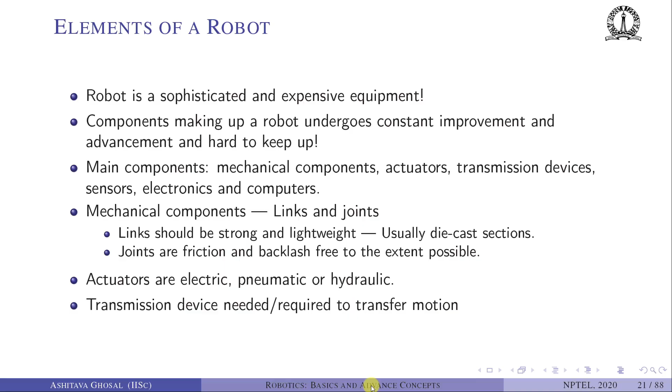We look at links and joints, we look at actuators, we look at transmission devices, and then we will also look at sensors. The sensors enable a robot to possess touch and feel, sense motion and force, and to see and learn. Sensors are required for feedback control.

These are sometimes called internal sensors. There are also external sensors which can sense touch and force, measure distances, and cameras which can see the environment.

There are also some specialized sensors for welding, painting, assembly, and other industrial operations. We need to make sure the weld bead is the correct height, and we can change some parameters automatically, or see that the welding is happening at the right place. So those are very specialized sensors.

The computers and software which go into a robot are often more expensive than the hardware. We have one or more processors to control the motion of the actuators. We sometimes have processors for signal processing and sensing. We also have processors for user interface, data logging, communication, and other activities.

So typically in a robot, you have a lot of computing power, and there is a lot of software which has been ported onto these computers to do a variety of tasks. We also have offline programming systems with user-friendly GUI to train the operator, verify motion, and reduce downtime of a robot.

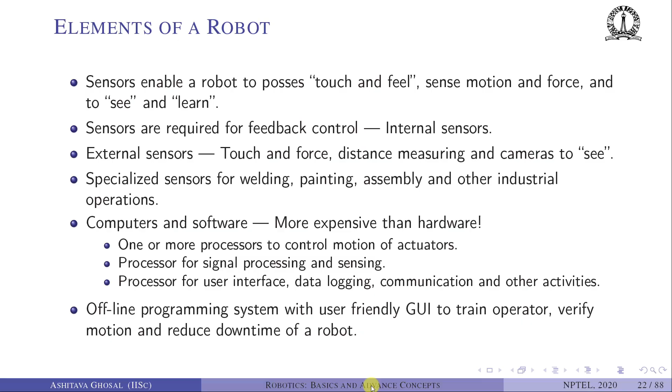Let's continue. As I said, we'll look at joints, links, actuators, transmission devices, and sensors in this lecture. So what is a joint? A joint is nothing but an element which connects two or more links.

Basically what does a joint do? It imposes a constraint on the links it connects. So if you have two rigid bodies in 3D space, each of them has 6 degrees of freedom, so you have 12 degrees of freedom total.

If you now connect these two rigid bodies using a hinge joint - a hinge joint is one which allows rotation or relative rotation between the two connected rigid bodies - then you have 6 plus 1 degree of freedom. So what has the hinge joint done? It has removed 5 degrees of freedom, imposing 5 constraints. So a hinge joint allows 1 relative degree of freedom.

We will look at these constraints in more detail in the lecture on kinematics of serial robots, and before that in week two when we discuss mathematical representation of links and joints. The degree of freedom of a joint in 3D space is 6 minus m, where m is the number of constraints imposed. For example, a spherical joint or ball and socket joint imposes 3 constraints, so the degree of freedom is 6 minus 3, which is 3, as can easily be seen.

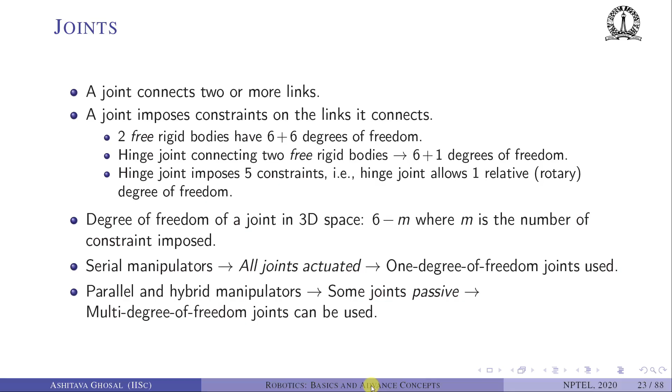These are some of the typical joints used in robotics. The screw joint is not so common, but sometimes used. You have one member which is shaded and one which is white. The white portion can rotate and translate about the screw axis, just like a normal screw. It is a 1 degree of freedom joint because the rotation and translation are related by the pitch of the screw.

You also have the rotary joint, which is a 1 degree of freedom joint. Again we have two members, just like a hinge joint, and the second member can rotate with respect to the first. Theta is the typical variable used to denote a revolute joint. We also have prismatic joints, where one member can slide up and down the other, and the variable used to denote this sliding motion is typically D.

We have a 2 degree of freedom cylindric joint, sometimes seen in closed loop mechanisms, where this theta rotation and the sliding D are not related. There is no pitch; they are independent.

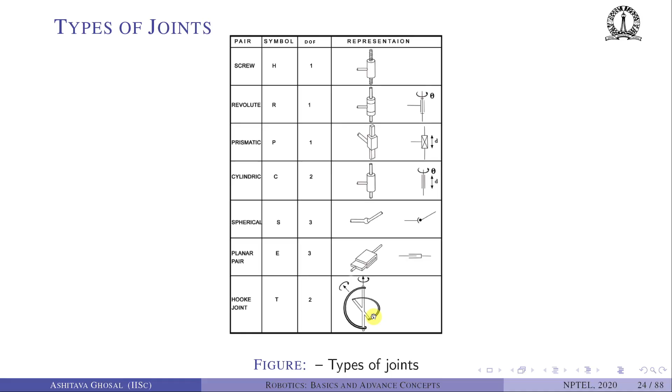We can also have a spherical joint with 3 degrees of freedom, which is nothing but a ball and socket joint. Another theoretical joint is called the planar joint: you have two planes with relative 3 degrees of freedom between them. The second object can slide in the x and y directions and also rotate with respect to the other object. We also have a Hooke joint or universal joint, with 2 degrees of freedom about two independent axes. These are some of the common joints used in robots, closed loop mechanisms, and parallel manipulators.

Let's continue. A link is a rigid body in 3D space, as far as kinematics, dynamics, and control are concerned - most of the time in control. Most robots are rigidly built, so we will not look at the deformation or deflection of a link. If you are interested in something like the space shuttle arm, then we need to worry about deflection, and the link is no longer rigid - we have to introduce deformation and deflection of the members of the robot.

A rigid body in 3D space has 6 degrees of freedom. It can rotate about 3 axes, giving 3 rotational degrees of freedom, and there are 3 translational degrees of freedom. So it requires 6 parameters - a link of a robot would require 6 parameters in general.

However, if the links are connected by rotary and prismatic joints, it is possible to use only 4 parameters to describe the relative motion of one link with respect to another. These are known as the Denavit-Hartenberg parameters, invented by these two researchers, Denavit and Hartenberg, in 1955. This is very useful, since for almost 65 years they have survived - if something is not useful, it would have died long ago.

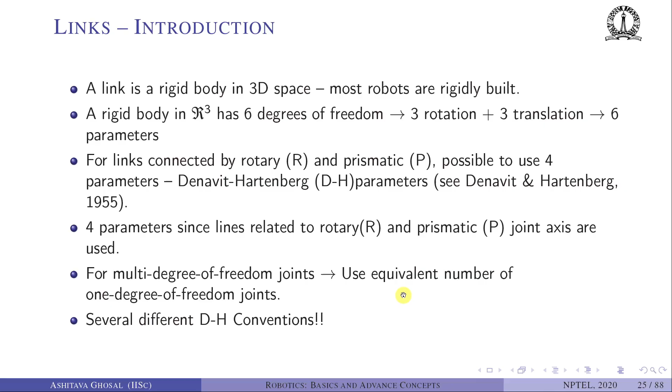Unfortunately, there are several DH conventions possible. Many textbooks have one way to describe the DH parameters, and other textbooks have another way to describe them. That is what happens when you go from 6 to 4 parameters - you have several possibilities. We will be using the DH convention that is in my book, which is actually borrowed from the book by Craig, a very well-known book on robotics.

So let's look at the robot. What do we really mean, how do we really describe it? This is a very brief introduction. We will look at all these things in much more detail in the second week.

So in this Puma robot, we have 6 joints. One rotary joint is here, where my cursor is. One rotary joint is perpendicular to that vertical joint. There is a third rotary joint here. Most of the time we'll see Z1, Z2, or Zi denoting the joint axis.

And then there are these 3 rotary joints which are intersecting at this point. This is also sometimes called the wrist point. So we have Z4, Z5, Z6 which are intersecting at the same place.

As you will see in more detail later, the DH parameters are these distances A2, D3, A3, D4, and so on. These are link lengths and link offsets, and you will also have some twist angles. So the angle between joint 1 and joint 2 is one such parameter. In this case, it has been built with 90 degrees, so that they are at 90 degrees to each other. We will have all these 4 parameters, which we will describe in more detail next week.

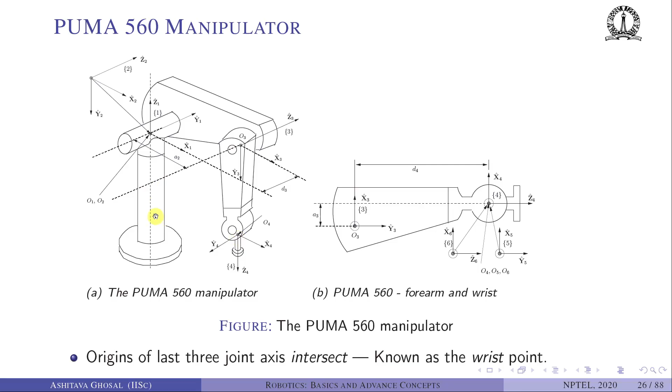In a serial robot, actuators must be of low weight. Why? Because the actuators of the faraway, distal links need to be moved by the actuators near to the base. So in the case of the Puma robot, the actuator driving the fourth joint must be moved by the first joint. If you have a very heavy actuator sitting on this fourth joint, the first joint will have to do a lot of work, put in a lot of effort, and needs to be very powerful. So we need actuators which are lightweight and of high power, since the distal links need to be moved by actuators near the base.

In the parallel robot, often actuators are at the base, so we don't really have to worry too much about moving another actuator. The actuator drives a joint through a transmission device. The motor most often is not directly connected to the rotary joint; there is some in-between device called a transmission.

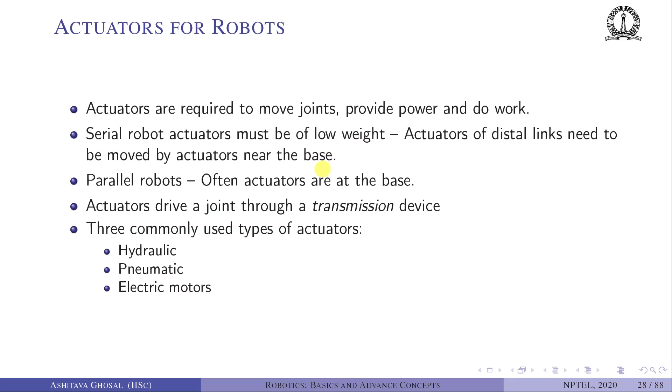There are three main types of actuators: hydraulic, pneumatic, and electric motors. Here are some pictures of typical actuators.

On the top left where my cursor is, this is a pneumatic actuator. In a pneumatic actuator, we have a reservoir where compressed air is kept, then some kind of valve, then a regulator and a solenoid, which lets air into the actuator. When air is let in, this end will go in and out. Sometimes there is an inlet at two places, one to send it in one direction and one for the other direction.

The hydraulic actuator is very similar, except instead of air, you have compressed oil. Hydraulic actuators can transmit much more force and power, because air is light and compressible, whereas oil or water is incompressible.

We can also have a DC motor. This is a nice picture of a DC motor showing all the parts. We have a rotor, not really seen here, which is most of the time a permanent magnet. On top of that we have the stator, which is coils. We send current through these coils, and due to Faraday's law, the rotor, being a permanent magnet, will start rotating if the direction of the currents has changed.

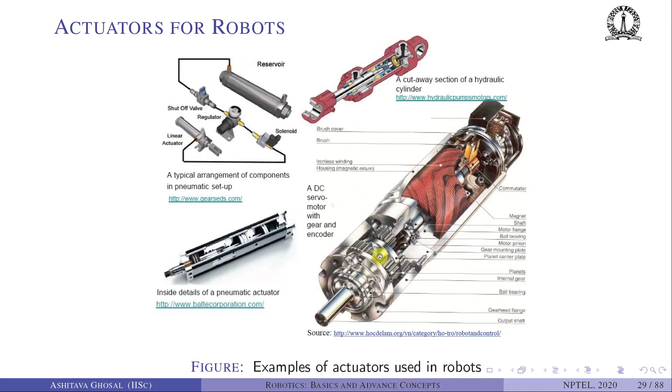We also have a device called an encoder, which measures the rotation of the rotor shaft, because in control we need to know how much the motor is rotating. Finally, we also need to reduce the speed of this rotor shaft. Typically a motor will rotate very fast, maybe 2000 rpm, and you cannot connect the shaft of the motor directly to the joint. So most of the time there is some kind of transmission device - in this case, a gearbox, which reduces the speed of the output shaft.

These electric motors or electromagnetic actuators are widely used in robots. They are readily available in a wide variety of shapes, sizes, power, and torque range. They can be easily mounted or connected to transmission elements such as gears, belts, and timing chains. They are also amenable to modern day digital control - they have an encoder which measures rotation, and this measured rotation of the shaft can be used to control the rotation or speed of the motor shaft.

There are three main types of electric actuators in use: stepper motors, permanent magnet DC servo motors, and brushless motors. In a brushless motor, the currents are not switched in the desired direction by means of brushes - it is done electronically.

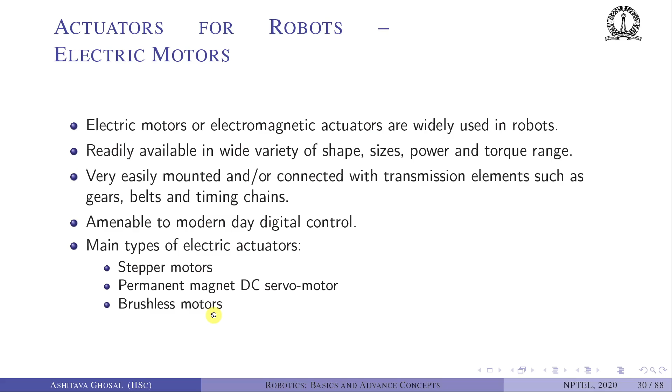The stepper motor is normally used in small robots with small payload and low speeds. Stepper motors cannot provide too much torque or operate at very high speeds. Stepper motors are typically permanent magnet, hybrid, or variable reluctance type.

These are some common terms in stepper motor literature. A stepper motor is typically actuated by a sequence of pulses. For a single pulse, if I give a single square wave, the rotor will rotate by one step. The steps are such that the rotor and stator become aligned at the end of the step. The typical step sizes in stepper motors are 1.8 degrees or 0.9 degrees. So every time you give a step, it rotates by that amount.

The speed and direction of the stepper motor output shaft can be controlled by the frequency of these pulses. If you want to rotate very fast, you give these pulses at a higher frequency.

One advantage of a stepper motor is that it can be used in open loop, because there is no cumulative error. The maximum error in a stepper motor is typically one step, so it will be a maximum of 1.8 degrees or 0.9 degrees depending on the step size.

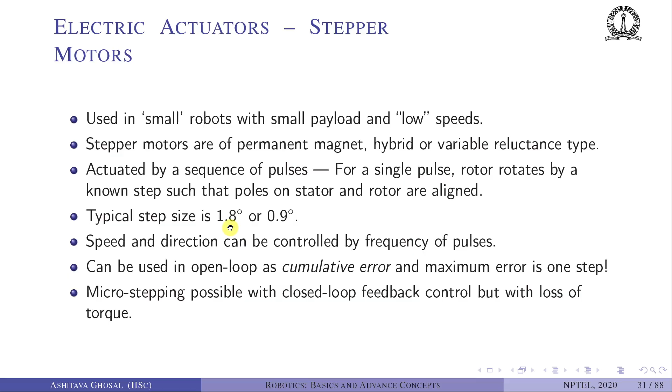This is a typical picture of a stepper motor. There is a rotor which contains all these teeth, then there is a casing, motor casing, and then there are the stators with coils. Schematically, what is shown here is the rotor with a number of teeth, which are magnets, and the stator which are coils.

Basically, if electromagnet 1 is activated, the rotor rotates such that the nearest teeth line up. If electromagnet 1 is deactivated and electromagnet 2 is activated, the rotor rotates again such that the nearest teeth line up. This rotation is by one step, typically 1.8 or 0.9 degrees. If 2 is deactivated and 3 is turned on, again it rotates by one step, until the teeth line up.

So it keeps on activating and deactivating, and each time a step is done.

A permanent magnet stepper motor is similar to the variable reluctance stepper motor, except the rotor is radially magnetized. Instead of magnetized teeth, we have this radial magnetization. We can also have hybrid stepper motors, which combine the best features of variable reluctance stepper motors and permanent magnet stepper motors.

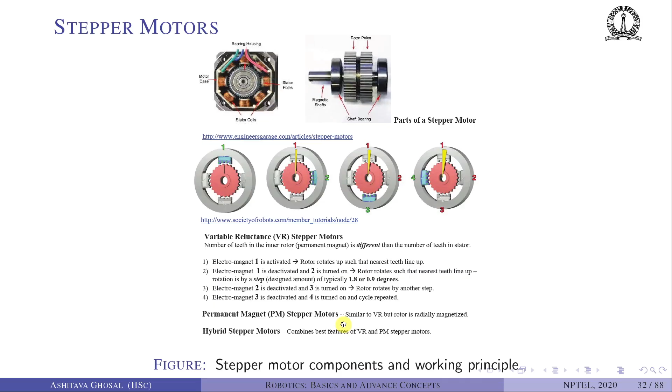We can also have DC or AC servo motors. The rotor is a permanent magnet again, and the stator is a coil. The permanent magnets are typically made with rare earth materials, such as samarium cobalt, neodymium, and various other rare earth materials, which can give very powerful magnetic fields, and hence high torques.

Commutation is done using brushes, or in a brushless motor using a Hall effect sensor and electronics. If you have brushes, this is the standard DC motor, where you change the direction of current because the brushes work that way. You can also do commutation using a Hall effect sensor and electronics—these are called brushless motors.

DC servo motor actuators are widely available in large shapes, sizes, power, and torque ranges, and are very reasonable nowadays. They are also easy to control because most of them come with an optical encoder, or we can fix one at one end. You can also attach a tacho generator mounted in line with the motor shaft, so we can measure both rotation and velocity, the speed of the motor.

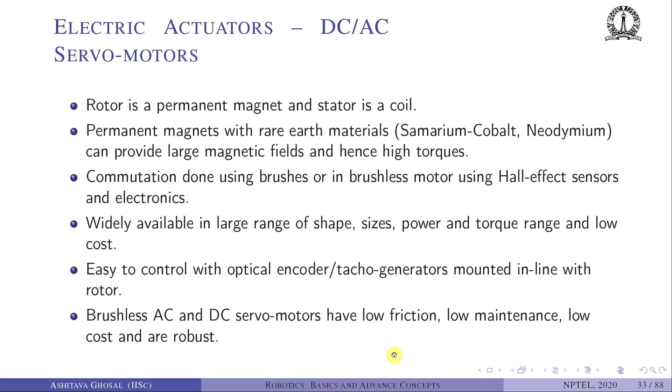Brushless AC and DC servo motors have very low friction because there is almost nothing in contact. They are also low maintenance, low cost, and robust. Most of the time nowadays, the trend is to use these brushless DC motors, also sometimes called BLDC motors.

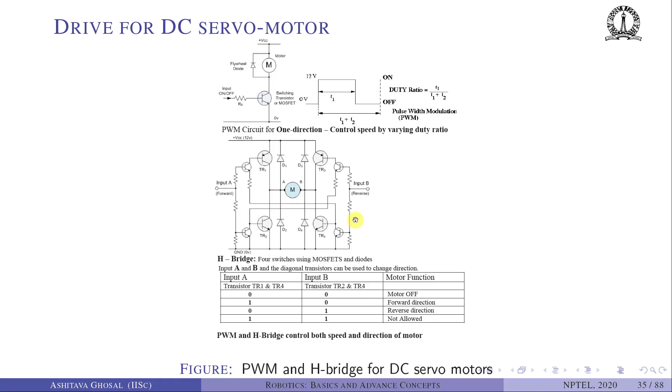Let's continue and look at transmissions which are used in robots. The purpose of a transmission is to transfer power from the source to the load, and also to transfer power at an appropriate speed. That is important - let's take an example.

Typical rated speed of a DC motor is between 1800 and 3600 RPM. For a quick calculation, let's assume the rated speed of a DC motor is 3600 RPM, which is 60 rotations per second, roughly equal to 360 radians per second, assuming pi is 3. For a typical 1 meter link, if you connect this motor to a 1 meter long link, the tip speed will be omega times r.

Okay, r is 1, so this is 360 radians, we'll get 360 meters per second. This is really, really high. It is in fact greater than the speed of sound. So hence we require a very large speed reduction.

And that is one of the purposes of the transmission, to transfer power at the appropriate speed. What is the typical appropriate speed? Instead of 60 RPS, we probably need 60 RPM, which is 1/60th of this. Even then, it is like 6 meters per second, which is not a good idea. We even need more speed reductions.

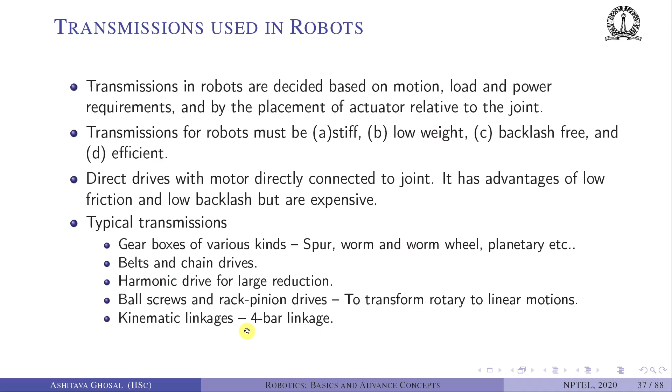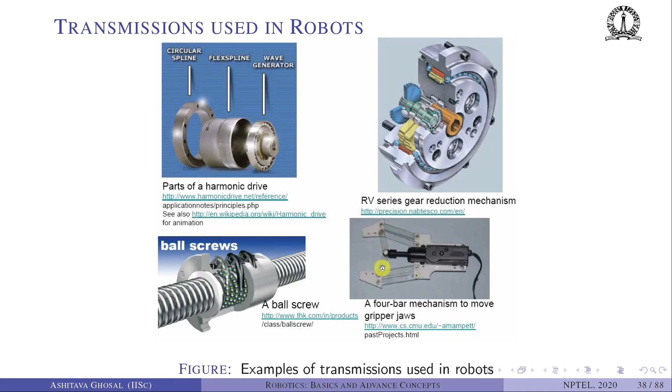As I said a few minutes back, you can have a 4-bar mechanism to move the jaws of a gripper. So when I rotate this motor, with this 4-bar mechanism, link 1, link 2, and so on, these jaws can move parallel to each other, which is advantageous. We want to grip an object, we want the jaws to move parallel to each other.

Next, we come to elements of a robot, which are sensors. A robot without sensors is like a human being without eyes, ears, and sense of touch. A sensorless robot requires costly and time-consuming programming. It can only perform in playback mode if you don't have sensors. It cannot adjust to changes in environment, tooling, and workpiece.

Sensors constitute the perceptual system of a robot. They are designed to make inference about the physical environment, to navigate and localize the robot by itself, and to respond more flexibly to events occurring in the environment. So if somebody comes in front of this mobile robot, it will stop, and when the person has moved away, it can again resume its path.

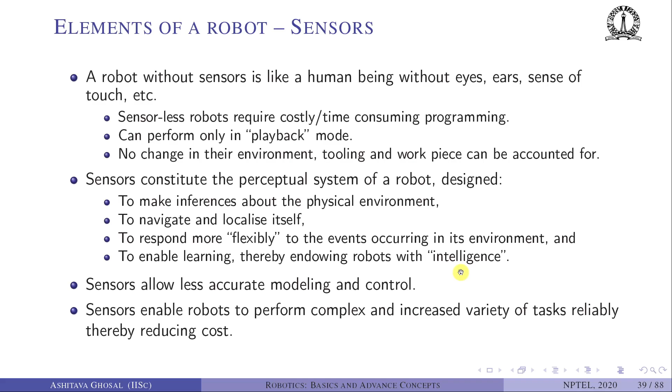Sensors are designed to enable learning, thereby endowing robots with intelligence. Sensors allow less accurate modeling and control, which we'll see later on when we look at control. And sensors enable robots to perform complex and increased variety of tasks reliably, thereby reducing cost. Okay, let us continue.

There are two main categories of sensors in robots. These are called internal and external sensors. The internal sensors measure variables for control.

We need to measure the joint position. We can use what are called incremental and absolute encoders. We also need to measure the joint velocity, which is measured using something called a tachometer.

We often need to measure the joint torques and the force which the robot is applying to the environment. There is something called the force torque sensor, which you can mount at the wrist or the end effector. So position, velocity, and force are often used to control the robot to achieve the desired task or apply the desired force.

We also have sensors which are called external sensors. These are basically for proximity - we want to detect something very close to the robot. You also want to detect slip - if the robot is gripping some object, how do we know that it is gripping properly and that it is not slipping? We also need to measure distance of the robot from an obstacle or from some other object which we want to go towards or avoid.

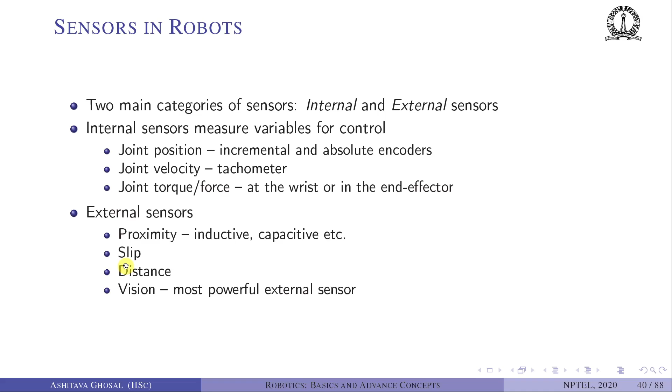And there is this thing called cameras and vision sensors, which are very powerful external sensors. A camera can be used for a wide variety of tasks.

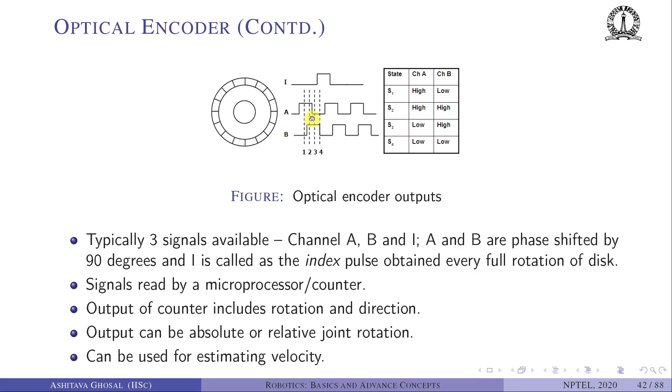Let's look at a force torque sensor. This sensor is used to measure the forces and moments which are acting at the end effector or at some other points like the wrist. We can either measure these forces and torques at the joint or the wrist.

The force torque joint sensor lets you estimate the torque using strain gauges at the joint itself. So there's a motor, there's a joint, maybe a transmission in between, and I can set up something with a strain gauge which will tell you how much torque the motor is applying by measuring some output from the strain gauge.

The force torque wrist sensor is more interesting. It is mounted between the end of the arm and the end effector, and it can measure all 6 components of force and torque using strain gauges.

It is extensively used in force control. I would like to control the forces which the end effector is applying to the environment, and in any control you have to measure and use feedback. So this force torque sensor is used to measure the force, and then this feedback control is used to make sure that the desired force or torque is applied.

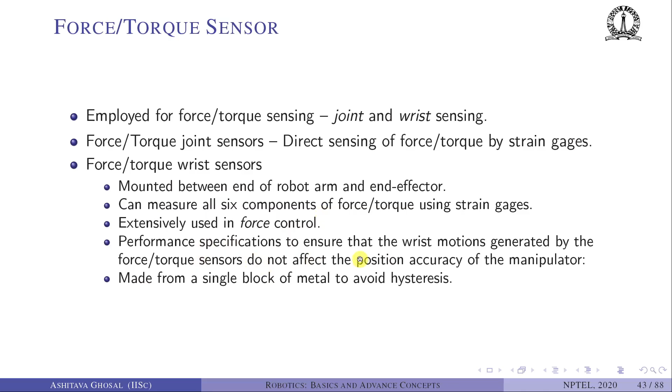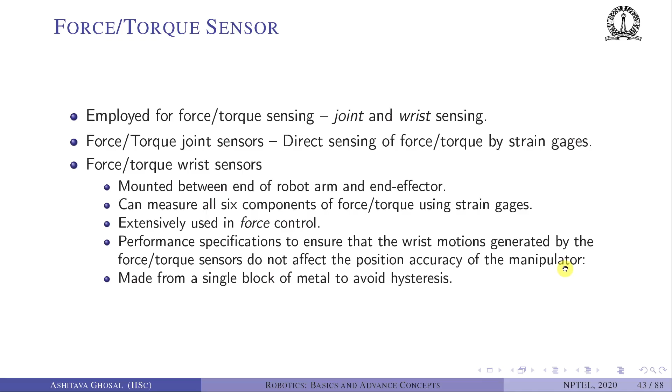The performance specification ensures that the wrist motion generated by the force torque sensor does not affect the position accuracy of the manipulator. This is very important. If you mount a force torque sensor at the wrist, it should not affect the kinematics or introduce errors in tracking. Most of the time, such a force torque sensor, which I will show you next, is made from a single metal block to avoid hysteresis.

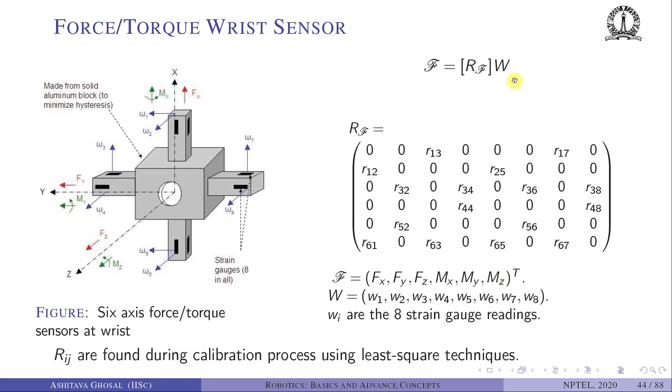At IISc, we developed another kind of force torque sensor based on a Stewart platform. We have a Stewart platform as the top platform, and a fixed platform, with legs as shown earlier. There is a joint here and a joint here, and instead of a prismatic sliding joint, we have a ring like this.

If I apply a force in this direction, this ring will deflect—from circular it becomes more oval. If you can measure the strains acting in the middle layer of this ring, the middle part sees the maximum strain, not here—similar to a cantilever beam, where the base sees the largest strain and stress when force is applied at the end.

So the largest strain will be here. We measure the strain gauges at this location, and for 6 of these we measure all the strains, and relate the force and moment applied at the top platform to the strains acting on these rings.

You can do calibration, and although I'm not discussing it now, this force torque sensor is designed such that it is more sensitive to Fx, Fy, and Mz. We can also design a force torque sensor based on a Stewart platform for other components of force and moment—in this one, the legs are more or less vertical.

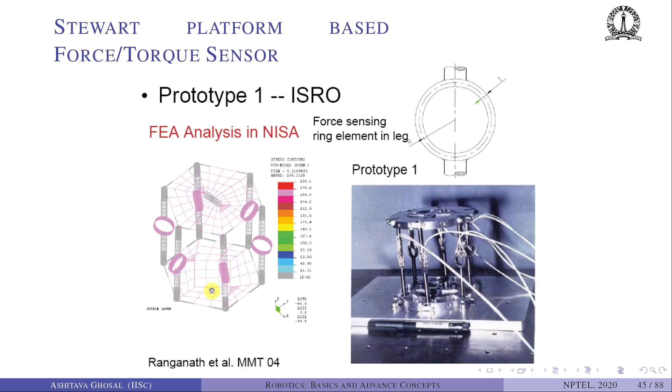This hexagon at the top and the hexagon at the bottom are exactly equal. With such a design, you can show that Fx, Fy, and Mz will be very sensitive. Sometimes that is required—in many applications, some forces and moments are very small, but you still need to measure them, so it gets automatically amplified in the Fx, Fy, and Mz directions.

We did this calibration by applying some known force, and we plot Fx, Fy, and Fz. You can see that Fz is not changing much, whereas Fx and Fy are changing in the first leg, and so on. These plots show that this sensor is sensitive to the Fx and Fy components.

These are the plots of applied external force and the leg forces being measured. In each of these 6 legs, we measure the strains, and from that we can calculate the force.

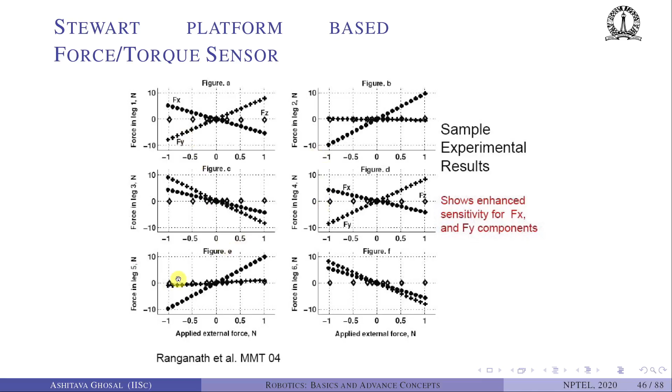So this is a well designed, purposefully designed force torque sensor such that we get very high sensitivity in the Fx, Fy, and Mz directions. We have also built force torque sensors where other directions are more sensitive.

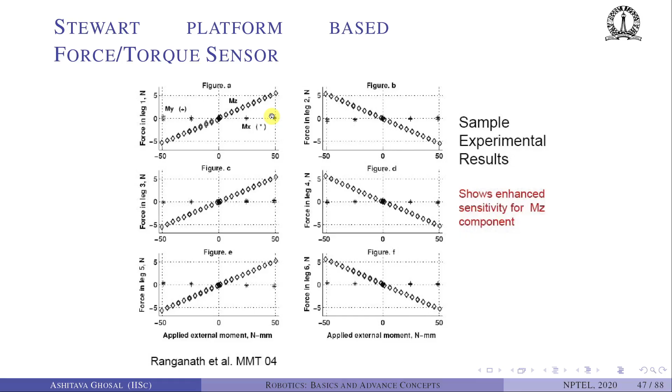Let's continue and look at sensors in robots which are external. What is the purpose of external sensors? To detect environment variables for robot guidance, object identification, and material handling.

If I want to see whether the correct object is there, I can command the robot gripper to go and pick it up. If the correct object is not there, or I cannot identify it, maybe I don't want the robot to go to that place. So there are two main types: contacting and non-contacting sensors.

Contacting sensors basically respond to physical contact—they are touch sensors, using some kind of switches and photodiode LED combinations. We can also measure slip and touch using resistive or capacitive arrays, and you can feel the environment—whether it is rounded or some other shape.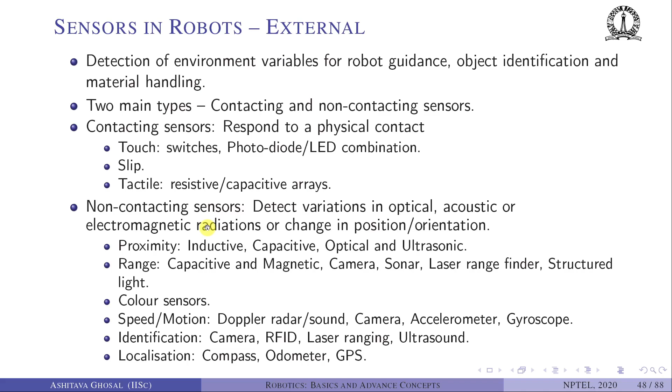Non-contacting sensors detect variation in optical, acoustic, or electromagnetic radiations, or change in position and orientation. So we can have proximity sensors.

There are various kinds of proximity sensors, which are inductive, capacitive, optical, and ultrasonic. You have range sensors, which can be capacitive and magnetic. It can be a camera. You can also use sonar, a laser rangefinder, or something called structured light. I will show you a few of them.

You can also have color sensors to detect the color of the object. I'm not going to discuss this in detail. And then we can measure speed and motion of the object in the environment.

There is something called Doppler radar. Then we can have a camera. We can also have an accelerometer and a gyroscope. Accelerometers and gyroscopes can be used to measure the speed, angular velocity, linear acceleration, and angular acceleration of the object.

We can also do identification of the object. We can again use a camera. There is something called RFID, where we can have tags on the object and read the tags using this radio frequency ID, and figure out whether it is the correct object or not. We can have laser ranging and we have ultrasound.

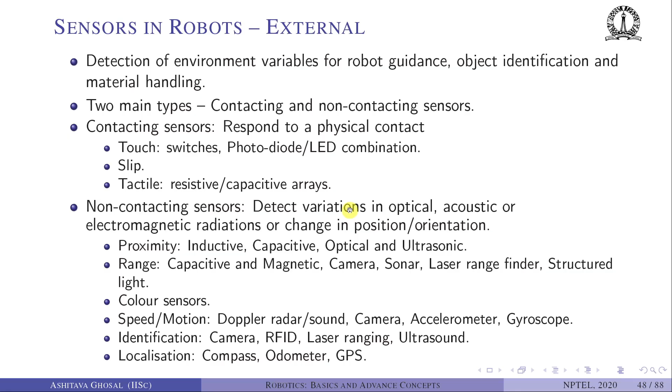Finally, we have localization. I want to know where my robot is in the workspace or in the environment. So you can either use a compass, or an odometer, where, if it is a mobile robot, you can count the rotation of the wheel and figure out how far you have traveled. You can have GPS and you can also use a camera. As you can see, a camera is very, very useful. It can be used in many such applications.

Let's quickly go through some of these common sensors. If you want a touch sensor, what do we have? We have a micro switch, an LED, and a photodiode. These sensors allow you to touch, feel, see, and locate the object.

If there is an object in this finger mechanism and it touches, you will get a signal from these micro switches. You can also see that this light beam will be blocked, and you know whether the object is inside the fingers or not. This is a simple LED-photodiode pair used to detect presence or absence of the object to be grasped.

I would like to know whether the object is there before I command the robot or the gripper to grasp it. When do you stop? When the micro switch detects that it has touched.

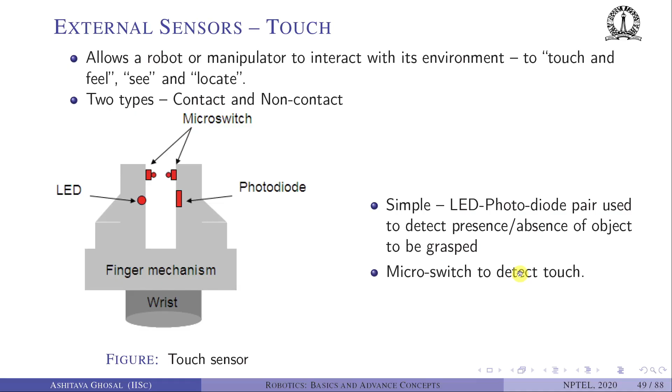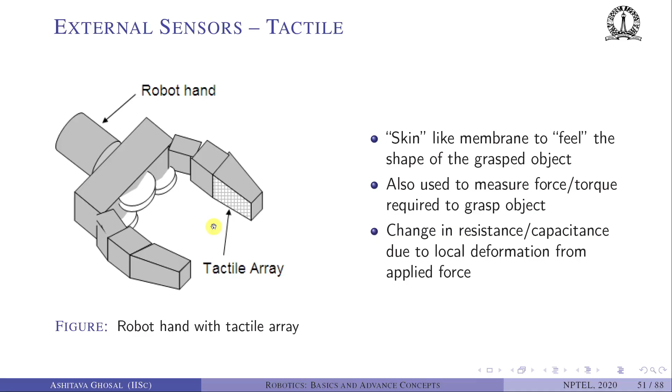You can also have what are called tactile arrays. It's a skin-like membrane to feel the shape of the grasped object. You can also use it to measure force or torque required to grasp the object. As I'll show in the next slide, there is a change in resistance or capacitance when you apply pressure on an object, and that change is used to feel the shape of the object.

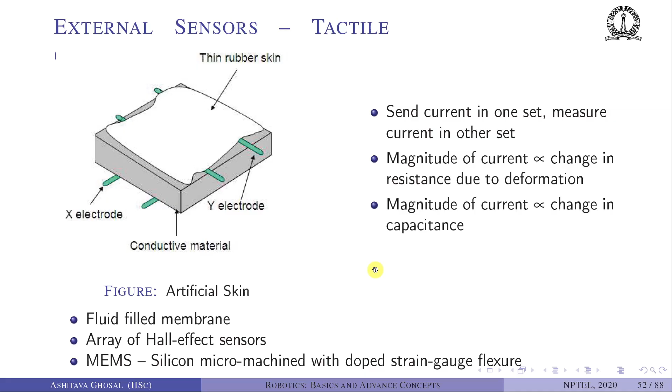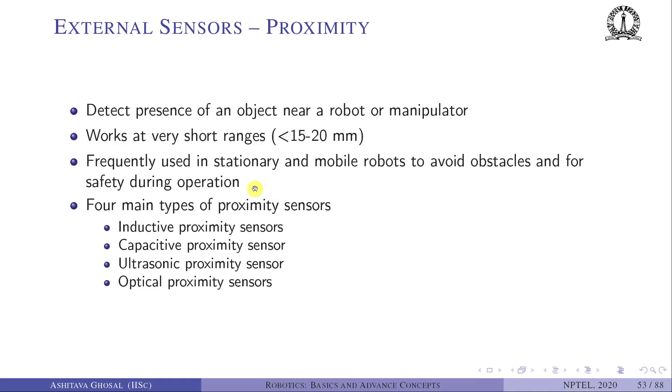You can also have external sensors which detect proximity. They detect the presence or absence of an object near the robot. It is not for large distances, working only for very short ranges, between say 15 to 20 millimeters. It is frequently used in stationary and mobile robots to avoid obstacles and for safety during operation. There are four main kinds of proximity sensors: inductive, capacitive, ultrasonic, and optical.

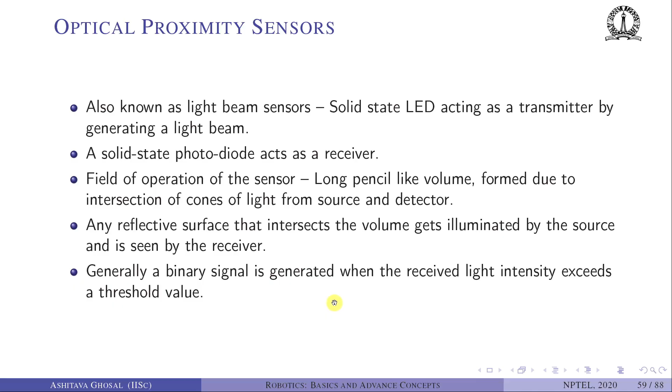Any reflective surface that intersects the volume gets illuminated by the source and is seen by the receiver. Generally, a binary signal is generated when the received light intensity exceeds the threshold value, so we can see whether there is an object in front of you or not.

We can also have range sensors. These are typically used to measure longer distances, not close to the robot, but objects at a much larger distance. We can use electromagnetic, electrostatic, or acoustic radiation, looking for changes in the field or the return signal. These are highly reliable with long functional life and no mechanical parts.

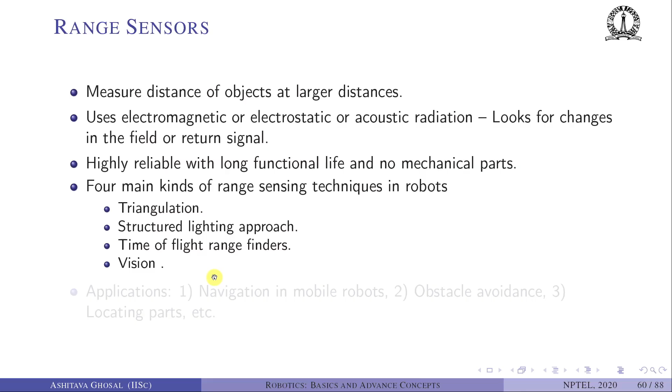There are four main types of range sensing used in robots. One is triangulation, one is the structured lighting approach. Then you can sense the difference in the time of sending and receiving the signal - these are called time of flight range finders. And then you can have camera or vision. The main applications of range sensors are in navigation in mobile robots, obstacle avoidance, locating parts, etc.

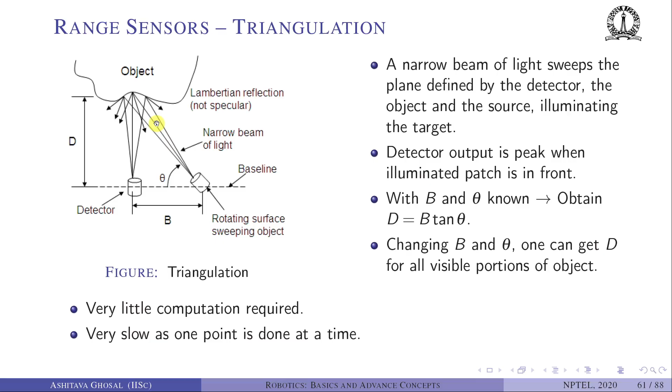It is very slow because we have to do one point at a time. If you send this beam, most of the time it is scattered. If it were a mirror, this will not work - this idea will not work. Those are called specular reflection. This technique will work only if the object shows Lambertian reflection, basically scattering. If it was specular, then I equals R, and you will not see anything at the detector.

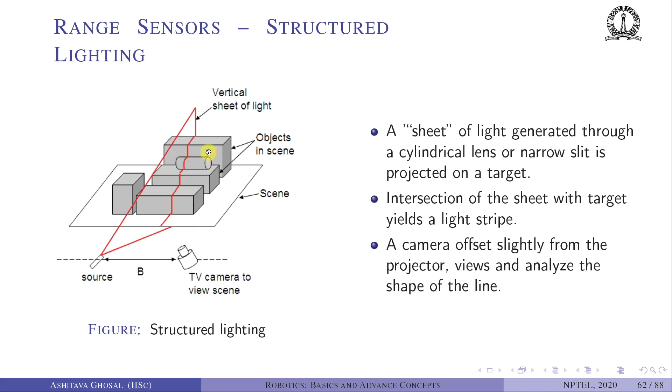The distortion of the line is related to the distance and can be calculated. The horizontal displacement in the image is proportional to the depth gradient. Integration gives absolute range, and we need to calibrate to obtain the distance. It is very fast - the advantage is very little computation is required, and it can scan multiple points or entire views at once. The big thing is you should be allowed to shine a sheet of light in the scene; otherwise this whole thing does not work.

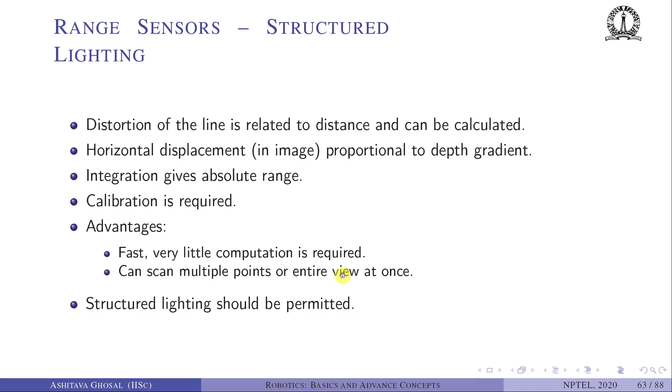The time of flight sensor works basically with the idea that you send a pulsed signal either from a laser or an ultrasonic device. You find the time taken by the pulse to return from a surface from where it is reflecting. So if d is the target distance, c is the speed of radiation, and t is the elapsed time, then d is ct by 2. Very straightforward.

For light, this is not very useful because c is very large - it's like 3 into 10 to the power 8 meters per second. But it can be used for measuring large distances, because if it is very close, this elapsed time will be very, very small. For example, if you want to measure a range of plus minus a quarter of an inch, we need to measure time intervals of the order of 50 picoseconds, which is not very easy to do.

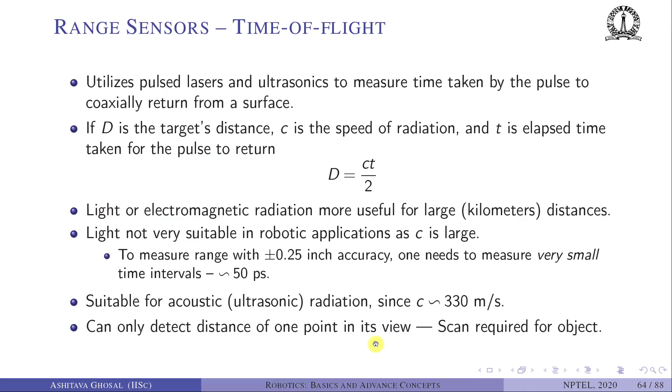However, this idea can be used for acoustic or ultrasonic radiation, because c is much smaller - it is 330 meters per second as opposed to 3 into 10 to the power 8 meters per second. This time of flight sensor can only detect distance at one point in its view from wherever the reflection is happening, and if you want to find different distances, we have to scan the object.

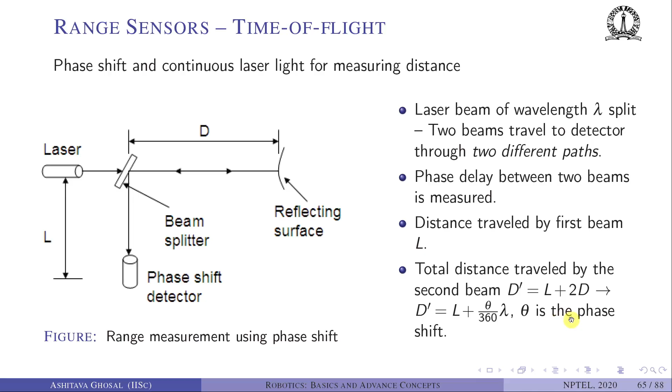So if you can measure the phase shift, for theta equals 360, the two waveforms are aligned, and d prime is L and d prime is L plus n lambda. The waveforms cannot be differentiated on phase shift alone.

If you restrict theta to less than 360 and 2d to be less than lambda, then this distance is directly related to the phase shift theta, and the expression is theta by 360 into lambda by 2. So I know the wavelength, I can measure the phase shift, and I can find the distance.

Typically lambda is very small, it is impractical for robot applications. Lambda of light is very, very small, of the order of some microns. But we can modulate this laser light with a waveform of much higher wavelength. For example, if the modulating frequency is 10 megahertz, then this lambda, which is c by f, is 30 meters, and distance up to 15 meters can now be measured.

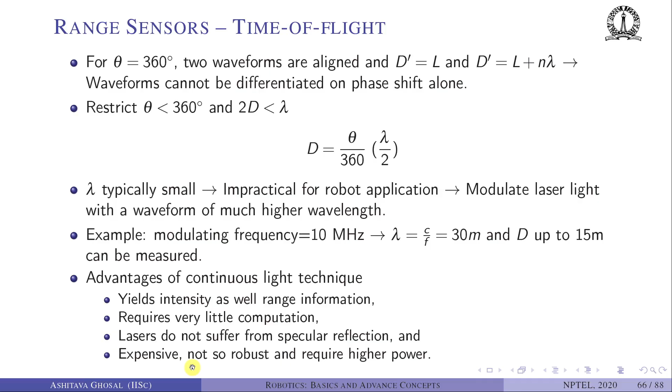The advantages of this continuous light technique is it yields intensity as well as range information. It requires very little computation, and lasers do not suffer from specular reflection. But it is expensive and not so robust, and it requires much higher power.

Range sensors which are ultrasonic are very similar to pulsed laser. Instead of a light pulse, we generate an ultrasonic chirp which is transmitted over a short time period. From the time difference between the transmitted and reflected wave, D can be obtained, and it is generally used for navigation and obstacle avoidance in robots.

Remember the speed is much smaller, so we can find out distances closer. It is much cheaper than a laser rangefinder, and shorter range is more desirable. If you want to measure large distances, these ultrasonic waves will disperse and you will not get a very good signal, since the wavelength of the ultrasonic radiation is much larger. Unfortunately, it is not reflected very well from small objects and corners.

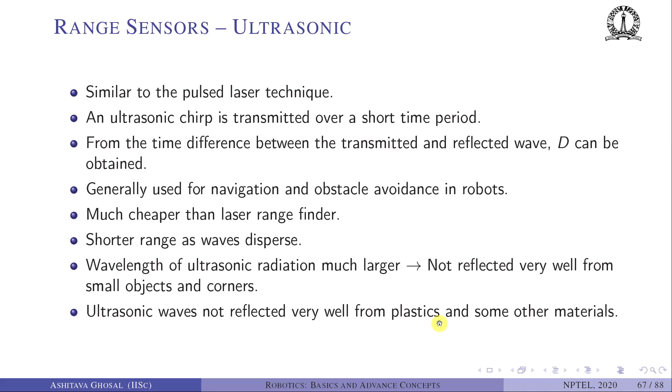So I cannot use these ultrasonic range sensors if the object is very small. The ultrasonic waves are also not reflected very well from plastics and some other materials. So if you have lots of plastic in your environment, and if you have an ultrasonic range sensor, it will sometimes give erroneous results.

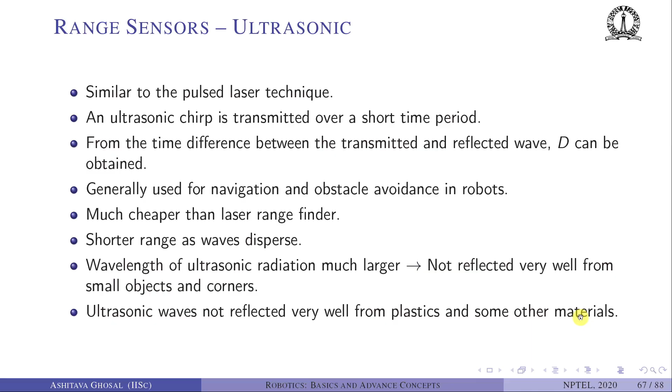Finally, we have vision sensor. As I have mentioned earlier, it is one of the most powerful and complex forms of sensing, analogous to human eyes. It comprises one or more video cameras with integrated signal processing and imaging electronics. It includes interfaces for programming and data output and a variety of measurement and inspection functions. This technique is also sometimes referred to as machine or computer vision.

There is a whole field called computer vision, with lots of work, research, and papers in this area of machine vision and computer vision. A large amount of work is done in computer vision simply because the computations required are very large compared to any other form of sensing. Instead of proximity or laser rangefinder or any of these techniques, cameras require a huge amount of computation. Only very recently can we have processors which can process the measurement by a camera and obtain good estimates of distance.

Computer vision can be subdivided into 6 main areas. First is sensing, second is pre-processing, third is segmentation. This is an important part in computer vision, and it takes quite a bit of time. I need to know where there is shade and where there is image, where the reflection is - we need to know the edges, that is what is called segmentation. Then you can find some description, then you need to recognize the object, and then you need to interpret. Each of these requires a significantly large amount of computing.

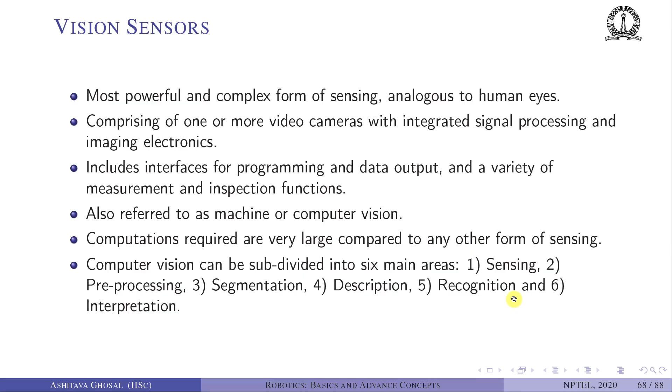There are 3 levels of processing. We have low-level vision, which is primitive in nature and requires no intelligence on the part of the vision functions - sensing and pre-processing can be considered low-level vision functions. Medium-level vision extracts characteristics and labels components in an image resulting from low-level vision. This is the second stage, and it requires segmentation, description, and recognition of the individual objects at this stage.

So is it a cube? Is it a sphere? We need to recognize it - these are some of the medium level vision functions. The high level vision function is basically where we want to emulate cognition. Looking at a scene, once we know it is some object, can we infer something or can we take an action based on that? That is what is cognition.

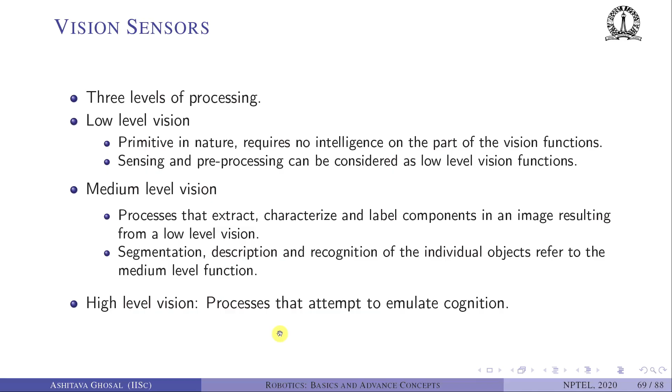There are an increasing number of robotic applications using vision sensors. This is primarily due to the increase in computational capacity and low cost of cameras. There are now cameras which are very cheap and which can be used for computer vision.

The vision system can determine the distance of objects, the geometrical shape and size of objects, and color and brightness properties. It can be used for navigation, to make a map, to do obstacle avoidance, and even for Cartesian position and velocity feedback. If I know the distance, I can somehow obtain an estimate of velocity also. It can be used to locate parts and many other uses.

A vision system can also learn about the environment. There's a lot of research going on to automatically do this medium level segmentation and try to figure out what object it is. It can also be used to acquire knowledge and intelligence.

Vision systems are extensively used in autonomous navigation in mobile robots. The Mars rover is a simple example. The rover is moving around on Mars, and there is a time delay between the signal coming from Mars to JPL or wherever it is controlled from. In between, it must do something autonomously because it can't wait for instructions always from Earth. So that is what is called autonomous navigation. A camera will see whether there is a ditch in front or not while it is moving. If there is a ditch, it can take decisions and stop or go around.

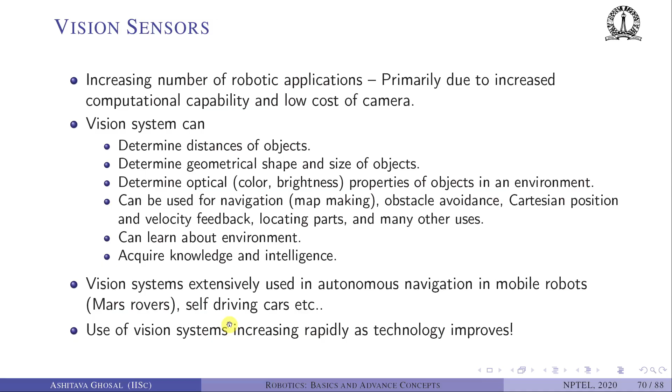I'll end this part on sensing with one example of a sensor-based robot, a very well-known example. This is called ASIMO, which stands for Advanced Step in Innovative Mobility. This is a humanoid robot developed by Honda Car Company, very far from their normal line of business of making cars. This robot looks like a humanoid - it has legs, it has arms, it has a head in which there are lots of sensors, for vision, speed, balance, force, angle, and foot area.

It has 34 degrees of freedom controlled by servo motors - there are 34 joints in this robot, all controlled by servo motors. This robot is capable of walking and running. It can maintain posture and balance. It can climb stairs and avoid obstacles. In this example you can see it trying to play soccer. In this example it is climbing stairs, and in this example climbing down, but it can climb up also.

It is capable of having some intelligence. What level of intelligence does it have? It can chart the shortest route from point A to point B using the camera. It can recognize moving objects and take decisions. It can distinguish sounds and recognize faces and gestures. So if someone is talking, it can turn towards you, and then it can shake hands. There are examples of this robot shaking hands with distinguished people on its own.

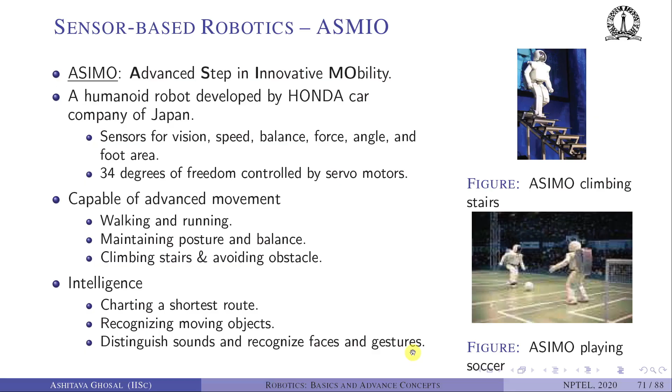So this is one of the best examples of sensor-based robotics. In summary, the main elements of a robot are links and joints, actuators and transmission, sensors, and computing elements. The robot is a very expensive, sophisticated equipment with expensive components. Sensors and computing add intelligence to the robot, and more of them are being employed in robots. Sensors, computing, and algorithms make up more than 60% of the cost - you might think the motors are very expensive, but that's not true. The sensors, computing, and algorithms which make a robot intelligent and autonomous are almost 60% or more of the cost.

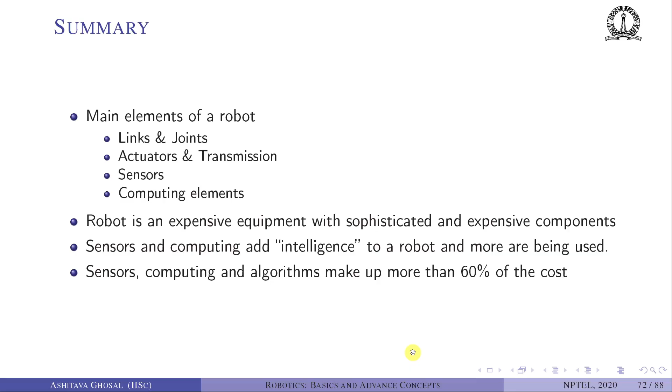With this, I will stop this lecture. We looked at the main elements of a robot. In the next lecture, we'll look at some of the modeling and analysis techniques used in robots.